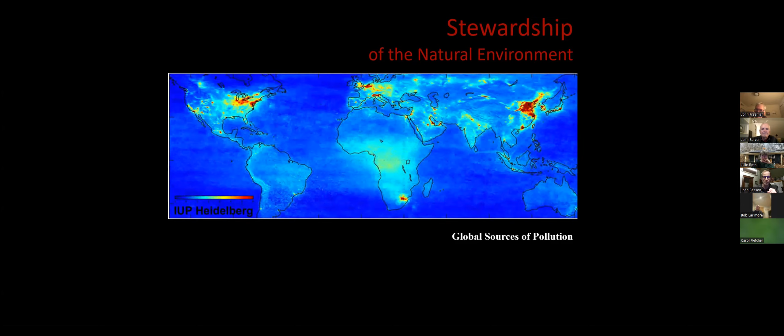Disasters were also something I grew up around, particularly the Exxon Valdez was something in my heyday that was pretty impactful. And then I learned that 10 times the amount of oil that was spilled from the Exxon Valdez was spilled in the Niger River Delta during a 10-year period, just by extracting this stuff that we need to power and engine everything we use. It just kind of boggled my mind.

So I know that there's kind of impacts that buildings have, and that was the kind of venture I took into my professional career, understanding that building impacts are pretty big. The other piece of the pie is transportation and then industry. And so I kept looking at the building impacts and thinking this is where I could probably go professionally.

But as I ventured off into learning more about this stuff, I kept thinking about how to make a green building, how to be green and make it greener. And solar was certainly part of that. I got my solar installation certification in 1994 up in Brattleboro, Vermont. I thought I was kind of a cool kid in college to be like, hey, cool, I can install solar panels. And there was no market for it, but I at least had a certification I could go and do it if I wanted to.

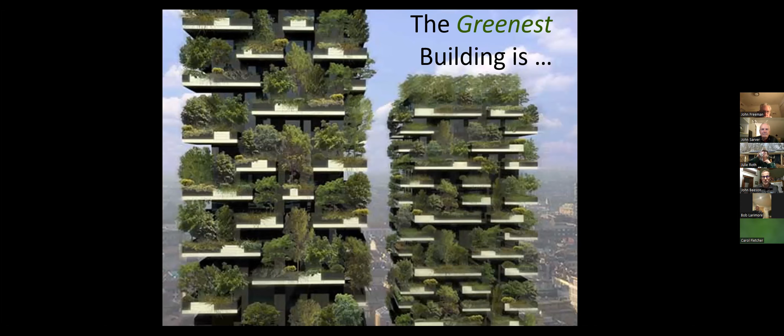A lot has certainly changed since then. The price per kilowatt is drastically different since 1994. And I also learned that the greenest building is the one that's already built. We have an existing building stock in this country and around the world that is pretty unique in what capacity it has and how it was designed in order to manage that capacity.

And the number one thing that we keep thinking about is, well, it's really tough to add solar to these existing buildings. And it's like, well, it is, but there's a lot of things we can do before we get there. So here's my house when I bought it, massively shaded by 2 pine trees that did a great job of shading it in the summer. But man, it was in shade pretty much all the time. And so I looked at that existing building.

To me, it was kind of like a matter of math. I sat there and said, well, I just need to make more out of what goes into and is already in my building. Like the energy I'm putting tons of energy into the building. There's also tons of energy in the building, just in the fact that it was cut down and built, and all the materials that went into it took a lot of energy. The water that's going to it, the water that was used to make it, the water that's still providing me with showers and drinking water is all things that I can look at in terms of simple math to do a better job with it.

So I kind of looked at strategies and benefits and paybacks and did a to-do list. And none of it actually worked in this order, because when you're a new homeowner, you just kind of work with the best you have and learn as you go. But most of the people on this call are probably pretty aware of looking at a to-do list: do your energy audit, determine your return on investment, tune that envelope, upgrade the energy hogs, and then start harnessing the free energy.

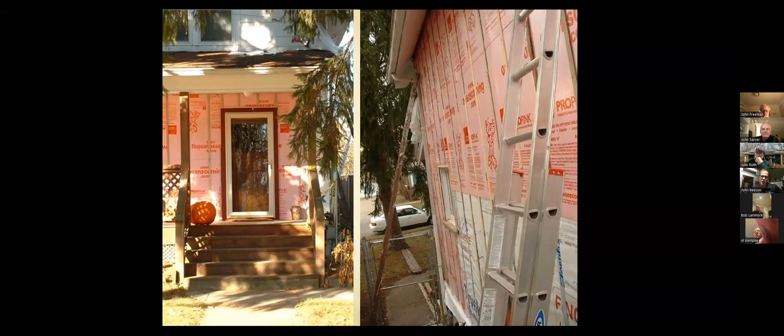I took apart the siding, started wrapping the house, wrapped it up in foam, took all the siding down, put it in the garage, then stripped all the siding of paint and put the siding back up. I bought some more siding just to address some gaps, but really focused on how to tune my envelope.

When I did this 20 years ago, the building science was still really new. If I had to do this all over again, I would take that quarter-inch piece of foam I added and make it like 3 inches, or actually two layers of 1.5 inch, and stagger the joints to really make it a tight envelope.

This doesn't go without saying that the basement was a huge energy hog too, and I addressed that later on with thermal imaging.

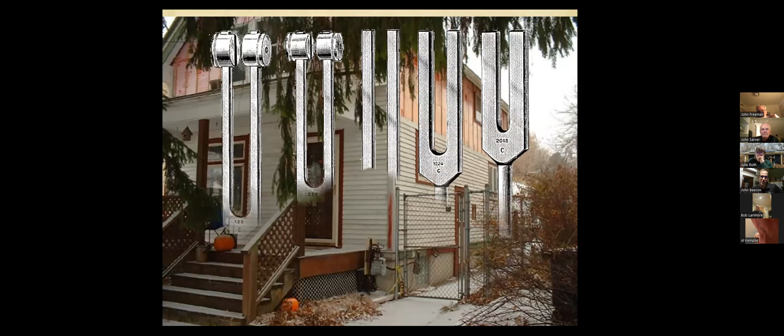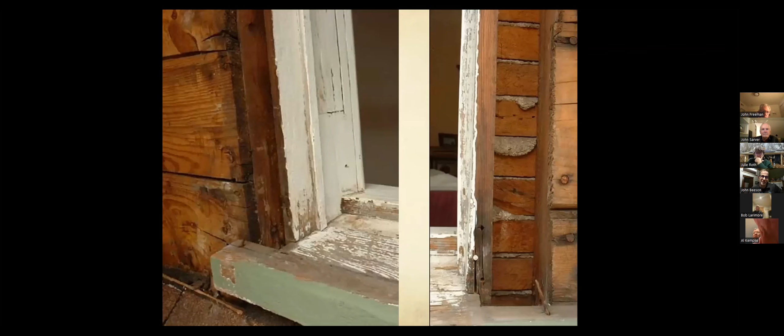So I brought out thermal imaging cameras and explored my windows and my doors, and started tearing apart the windows and doing all this work to tighten this envelope the best I can, adding weather stripping and storm windows, really getting engaged as a young, spirited homeowner with lots of energy.

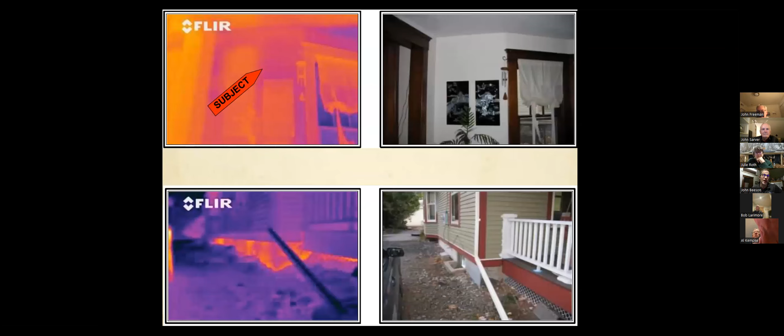Finding areas of the house where I'd think, oh man, this part doesn't even have insulation, or looking at the basement going, oh my gosh, look at all the heat that's escaping. So I really tried again to tune the envelope.

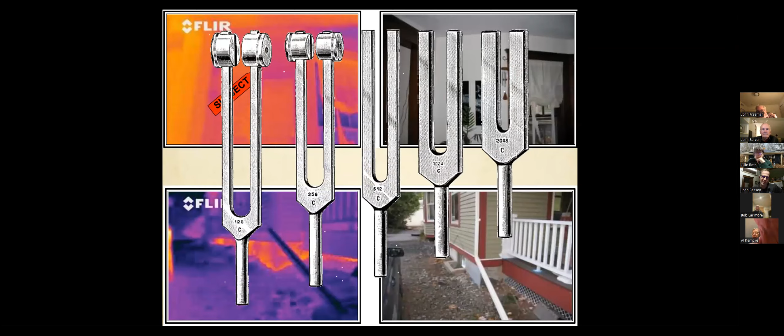My second priority was to upgrade the energy hogs, finding big sources of energy use and upgrading those. Lighting is always the easiest one, but appliances like the refrigerator, sure, that's always a big one. But also the mechanical system.

I was running a basic furnace that just took air within my conditioned environment, burned the crap out of it, exchanged it to heat the house, but then sent the rest of it up the chimney. Same with my hot water tank — it just burned all that conditioned air and sent it out the chimney.

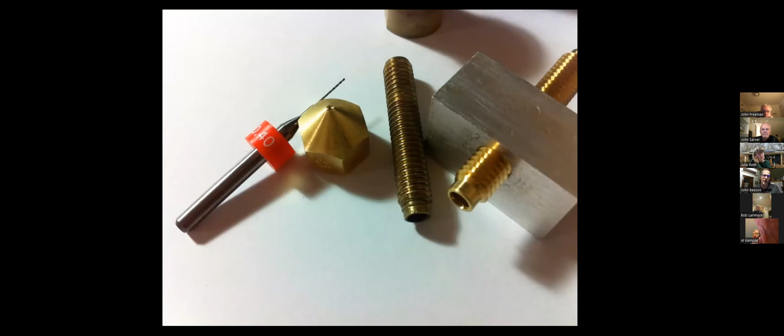So I tried to upgrade those energy hogs and really focus on how to make an improved mechanical system, way before I started thinking about going solar.

I did have solar on the brain — actually solar thermal on the brain. Of course now solar thermal technologies and their price points are very different than PV, but I still had solar thermal on the brain. So 15 years ago I started putting in these tanks to help figure out how to run the system on a hot water basis.

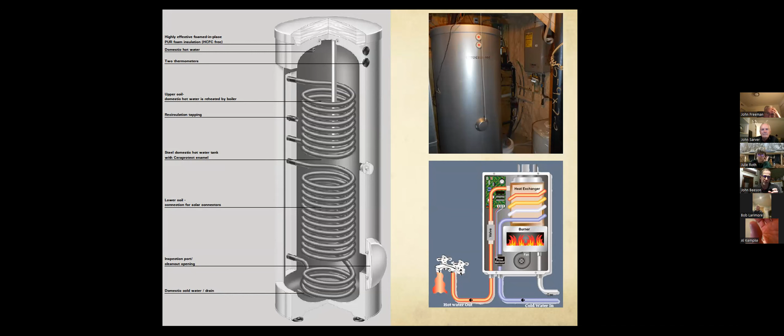I used it as an exchange system with a flash hot water heater, and then I replaced that and just did a direct connect with it, because the boiler was water grade anyway. So now the top boiler is just used as a radiant floor system.

So I put radiant floors in the basement, replaced the furnace with a water-to-air exchanger with an HRV in the system, which is great for old homes because these are really compact designs that you can shove in any basement, replace a furnace and still get the same kind of water-to-air exchange. I used water because it has a much higher capacitance for energy, and when I eventually moved to solar, I wanted to harness the sun's energy and put it into water as my capacitance, my transfer of energy system.

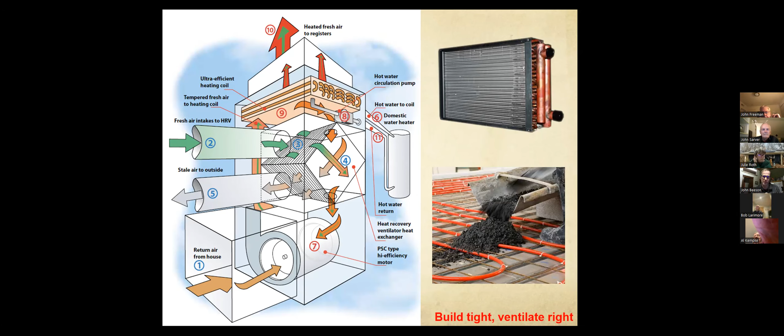The mantra I took was to build tight on the house, but also ventilate it right. So this is where I began to harvest the free energy.

Here's the solar part of the Great Lakes Renewable Energy Association. I'm finally there. I started this in 2013 to apply solar panels to the house.

This came on one of the projects of trying to revamp the house to put on a new roof. I was super insulating the attic at the same time, and trying to figure out why there was so much ice dams forming in certain areas of the house. The thermal imaging told me a lot about what was going on with the roof.

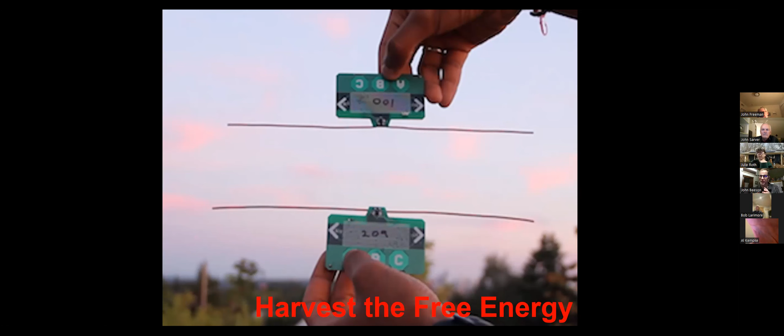So at the same time, I was like, well, if I'm putting on a new roof, I'm going to spend the money to put a metal roof on there so I could put solar panels on really easily. I don't know when I'll put the solar panels on, and I don't know what configuration, but I know a metal panel roof will make that very easy to manage. So that's what I ended up doing.

I looked a lot at the sky conditions and the insolation levels for this area. I started buying the solar panels and went through a program with one of your sponsors, Synergy, to get some panels installed. Got the panels installed despite kind of a negative attitude towards renewables and the general payback, especially in 2013.

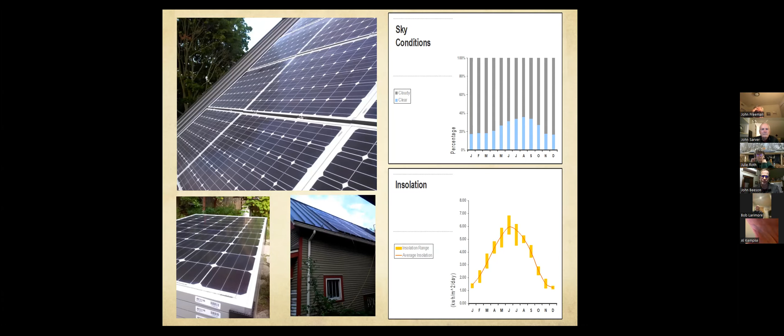To me, I did it much more as a market transformation. I still feel it's really important to encourage a lot of these subsidies and encourage the marketplace for renewables. I knew I was doing this as a way of encouraging the marketplace, that prolonging the oil inventory definitely won't foster stewardship. Stewardship had to start with me and spread outwards with other people as much as possible.

So I did install the solar panels. I started getting some good output. I installed them with the help of Synergy. We put them on the east side of the house. It was a hard kind of twist because you could see that the ridge of my house is north-south, so it's not ideal in any way to have solar panels.

And this is one of those moments where I was like the squirrel getting that nut. I was obsessing about the fact that I was worried I wasn't going to get my maximum output. I'm not going to get my maximum output no matter what I do. So I realized I just have to go for it anyway. Put those panels on, because having panels is a lot better than no panels at all.

And I equated it to recently starting up yoga two years ago. I used to joke with people about starting yoga, and a large part of it was like, well, I feel so stiff and so achy. And I'm like, yeah, but if you just do something to move your body, you'll get in much better shape. I used that as a springboard for yoga - just do a little yoga and you'll find that anything is better than nothing. So the solar panel kind of aligned with that, where I was like, something is better than nothing.

I got these panels on. We installed them where it was easy to install, which was pretty far down on the sloped roof. As a result, the PV watts wasn't matching. PV watts is a tool to help estimate solar output for the house, and I wasn't getting the solar generation I expected - it was probably half of what I thought it was.

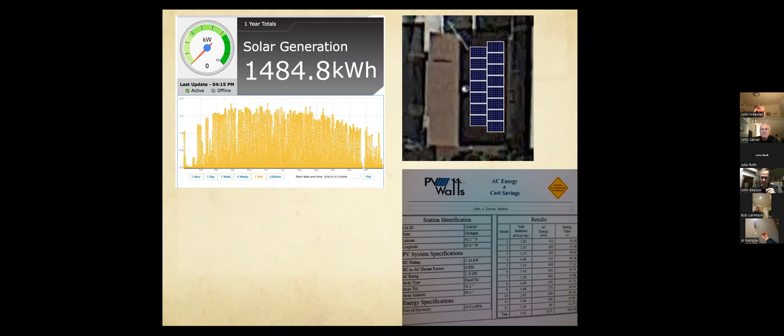So I called up a superhero of mine, Sumter Solar, and they came in and did a quite brief reevaluation of what we could do.

At the same time, I had bought the inverter with the mindset that I knew I was going to add more panels, even though DTE was very restrictive about the number of panels I could install. I said, well, I know eventually my electric usage is going to increase, so I can at least buy a bigger inverter than what they're going to allow for, reflecting more solar panels, but they'll never know anything about the inverter itself. So I got a bigger inverter knowing that I could add more panels.

Then with the help of Matt Cadwell and Sumter Solar, we reoriented things. So this is the layout. Right down the middle is the ridge of my house.

This now reflects that we put a bunch of new panels over here. We took the older panels and were able to squeeze them into this portion of the house. Then we added 8 more panels on the east side of the house, but moved them all the way up to the ridge, as close to the ridge as we could.

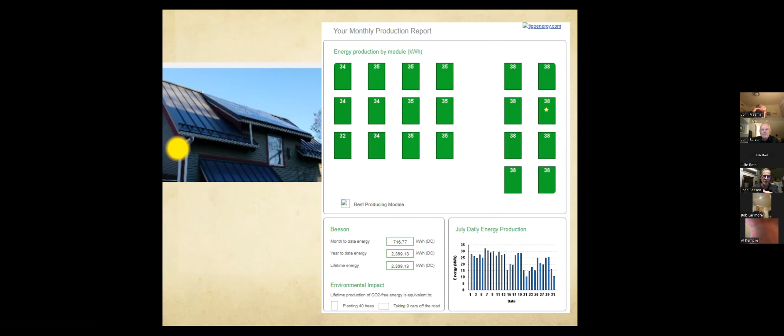The output definitely increased. Not just because of the new panels, but because of the overall improved exposure. I was pretty excited about that.

I was also excited that I was able to get little charge controllers on the back of each of the panels so I can manage and monitor the system in a better way.

February 24th tends to be that flipping point for me, just like October 28th is the flipping point for my house, where I tend to use more electricity from the grid than I get from my solar panels.

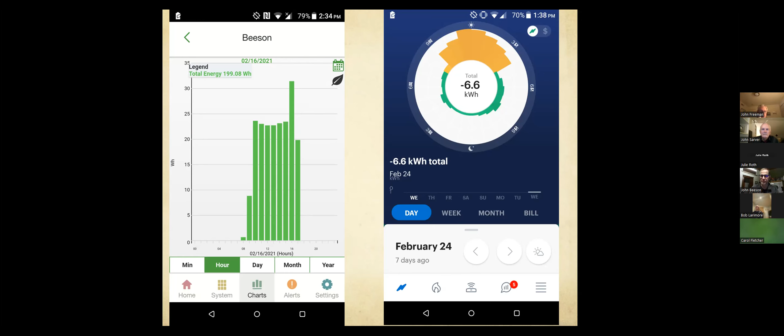So I'll backstep a little about the strategies. If you're thinking of solar and want to do more solar, look at the rest of the house first. Make sure you're tackling the rest of the house first, and then look at harnessing that free energy. As you're harnessing it, you can wash, rinse, and repeat this whole strategies and benefits to-do list to target other improvements you want to make.

So now I'm still negotiating the time frame in which I'll try to get an electric boiler to replace the furnace, the boiler, that I have now.

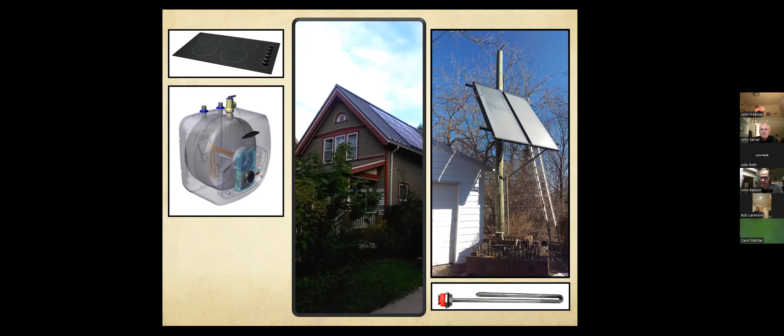If I had to do this all over again, I probably wouldn't do solar thermal, just because you can get so many PVs at this point at a price that makes much more sense. But here's my house now.

I'll highlight some things. So here is that tank, that double-walled heat exchanger that has coil above and coil below, and it connects to the radiant floor system. The radiant floor system is also connected to the flash hot water heater. Here's the flash hot water heater, and here's the radiant floor down here that exchanges from this top coil.

I also pull heat out and use that boiler to heat it really fast so that it can heat and get to the temperatures I need for the air handling unit. The air handling unit works best when the temperatures are above 140, which doesn't work really well when you want a domestic hot water tank that's around 120 because of the scalding potential.

So I kind of designed this system to operate based on the control, but use preheated water from the tank, so it's not using the maximum amount. And the flash hot water heater has a variable drive, so it fluctuates the amount of heat that it adds and the amount of gas that it uses based on the temperature in and the flow out.

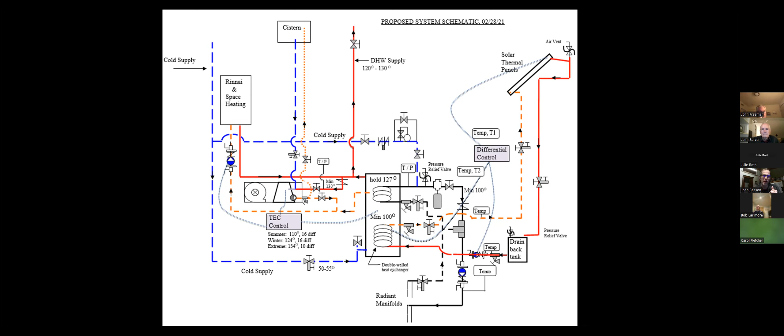Now, the battery backup stuff is also weird because right now I have an electric car, and I'd much rather use my electric car as that battery backup than try and bring in a whole bunch of batteries. So that is still something I'm kind of negotiating and trying to figure out.

I know the city has a program for the solarized where you could buy some batteries. But I was trying to push Matt and his team, scratching our heads going, okay, what can we do to get my car to just plug in? Because it's got a 64 kilowatt-hour battery that should last a lot of days on my house. And if I can charge that thing with a lot of solar going on at the same time, then I would have a good buffer.

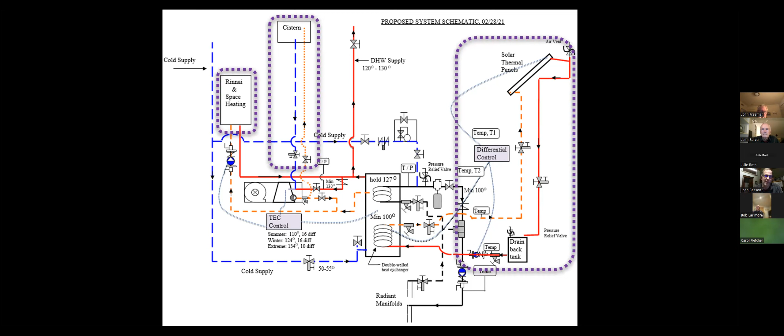Yeah, so that's me. Thanks.

That is right, great. Thank you, John. You're welcome.

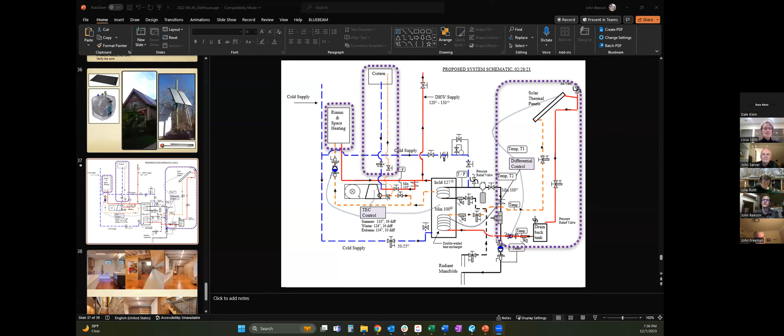So here, let me share the screen again. This may help—let's see if I can get the right screen. I'll just go to this screen. Can you see it? No, they're not sharing. Share... go... is that doing it? Yes, okay, let's go to that one.

So this is the unit. I had to get it from Canada at the time I put it in—this was like 2010. It was called Lifebreath. I know a lot of manufacturers make this now, but it's the same dimensions as a furnace, just with a variable speed fan. Then it's got the HRV, and you can get an ERV unit in it now, and then it's got the water-to-air exchange. My tank just sits there and feeds water into the top tank.

My long-term strategy was with the cistern—I was going to use it as a way of taking colder water and bringing it in to use as my conditioning air, because I knew I could get the water temperature to be 50 degrees all the time. That would definitely knock down the temperature in the house. The house is so well insulated that it takes probably 3 days in a row above 95 degrees for it to get really uncomfortable.

The night ventilation does amazing work, but the more nights we have that aren't below 75 degrees, the harder it is to night ventilate. But the biggest change was just insulating the house, super insulating it—that made a major difference on comfort, along with the windows. Most people rip out their windows and put in new ones, but I took the time to rebuild these 100-year-old windows so they'd last another 100 years. That wasn't around at the time—Lori Sipes didn't have her business yet. I wish she did, otherwise I totally would have hired her and saved a lot of time.

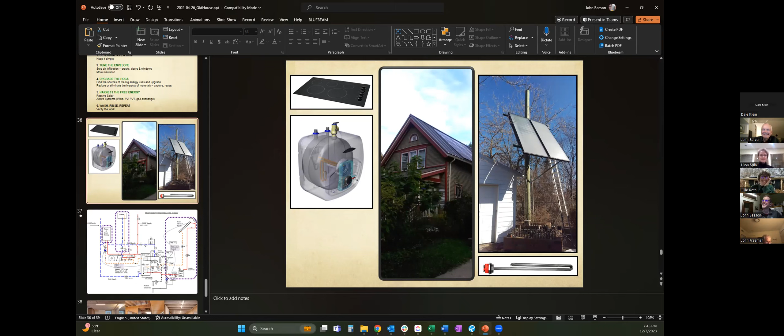Can I ask one more question? Yeah, go ahead, Tim. So in the future, when you go away from gas, if you want to go to a heat pump...

I mean, you have a high temperature, so the heating to the rest of the house is the radiant floor in the basement, and then this air handler that heats through ducting through the whole house? Yep, yep, yeah. And I personally redid all the ducts.

So you don't have water emitters in the whole house other than the radiant floor in the basement? Nope. So you'd probably stay with heating through air to the whole house? Yes. Yeah, and surprisingly enough, like the shoulder seasons, the radiant floor does enough.

I may not get the ventilation air that I need in order for fresh air requirements, but most of the time that's accomplished if it's open door, open window, what have you. But I could also just set the Lifebreath system to run on a timer to circulate the air and get some fresh air in there. But it's also just a few of us in the house, so we're not producing a lot of indoor pollutants.

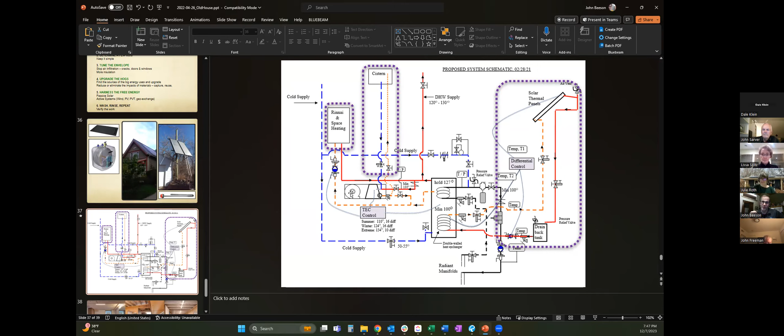Does the HRV or ERV—I forget if you said it's an ERV or an HRV. I have an HRV. The equipment does come with an ERV option now. Yeah, but for around here, you probably want an HRV. Yeah, an HRV is all I really need.

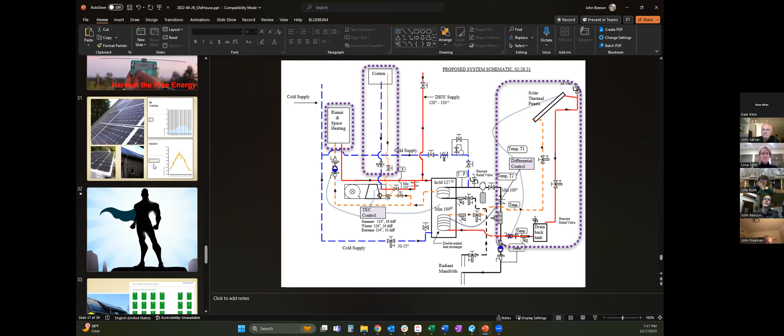That unit has a blower like an air handler would for a furnace, but then it has two separate fans for the intake and exhaust—fresh air, stale air. No, it doesn't work that way, let me explain. The one main blower causes the right amount of inflow and outflow to the outside. It's got chambers within here that pressurize the system and draw it in and push it out. And it's got a little damper control here too, so I can set how much I want it to provide fresh air.

Like during the summer smoke and forest fires that occurred, I actually taped these off and just ran the system so that it would continue to filter the air, but not bring in anything from outside.

Yeah, I would say that's the one drawback—it doesn't filter the outside air, right? It's doing fresh air exchange here so that it's heat exchanged, but it doesn't filter this indoor air, this air coming in. Which I would love to be able to get a filter on this.

You could put a filter inline before it brings it in, but you'd need fans on each duct that you could adjust to get the airflow that you want. I didn't think about forest fires at the time of putting this in. That's for sure, yeah, that doesn't usually happen.

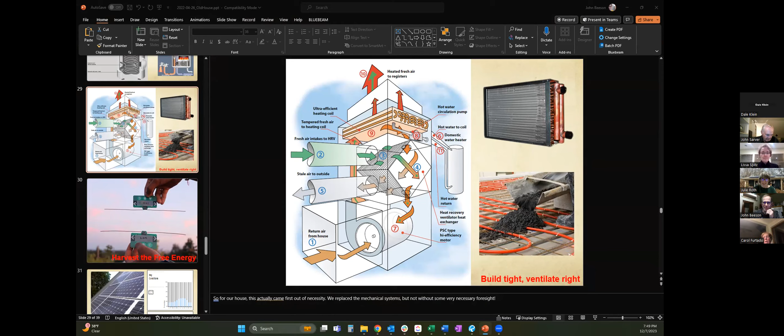Awesome. Other questions for John? Anybody? You want to hire him? I think it sounds like you ran out of energy though, so we might. I ran out of energy to do my own stuff, but yeah.

I do a lot of commercial work—that's mostly where I fit now. Residential is more of a hobby for me, just to learn the stuff I wanted to play with.

But I do commercial work now. What are you doing in the commercial space? I would say I help project teams manage their LEED goals—Leadership in Energy and Environmental Design—but also their goals towards how to make a green building. Everyone comes with a different mindset of what they want to do, and they're like, we want to be green. And I'm like, well, what does that mean to you? Then we try and help implement exactly what that is. A lot of times it's through the LEED structure, but it doesn't have to be.

Is it new builds that you're mostly working on? It's a mix—I have a lot of existing projects and a lot of new construction. It crosses over from setting these goals to trying to do retrofits, doing a lot of commissioning on the retrofit, but it's also, when you have an existing building and you're trying to decarbonize it, what's the path for decarbonization? So we try to do energy modeling and calibrate that energy model so it's close to the building, and then we start doing energy conservation measures to see how well you can get to that decarbonization, and then add solar.